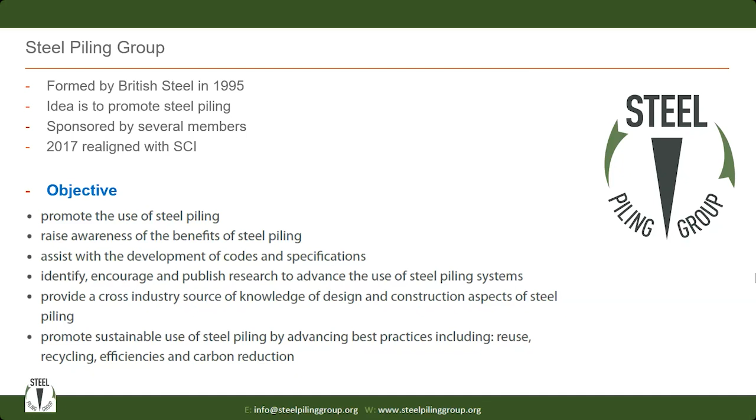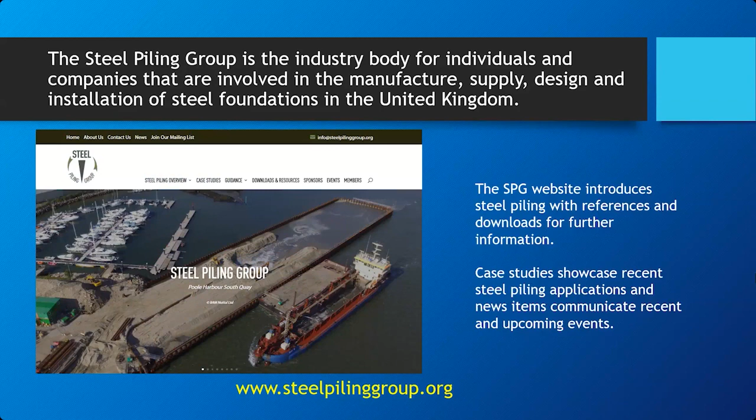On the website, you'll find six guidance notes. These are really helpful, practical, down-to-earth guidance notes on topics that frequently cause questions. The Steel Piling Group has 13 sponsors, who might be plant manufacturers, material suppliers, or contractors, and we're grateful for the sponsorship of this group.

I'll just finish off by showing you a couple of our recent publications. P308, the Specifier's Guide to Steel Piling, is our newest publication from last year, and it gives a very broad overview of essential topics to do with steel piling. Broadly speaking, our webinar today will be based on the topics covered in this publication, and you've got a free copy. The other publication is an earlier one, Durability of Steel Piling, which came out in 2019 and gives the latest understanding and guidance on how to be confident in the durability of steel piling. That is also freely downloadable from the Steel Piling Group website.

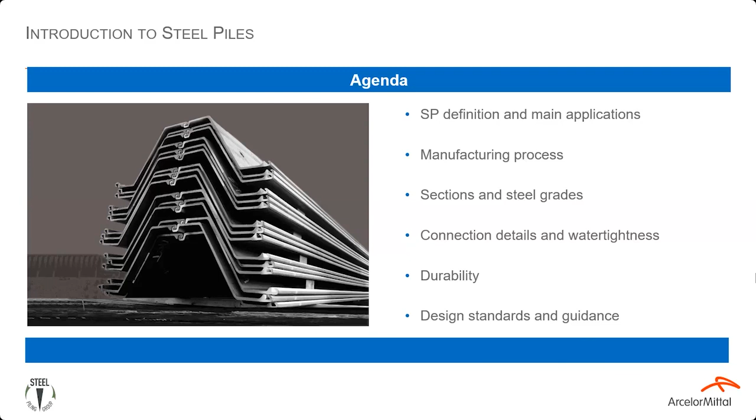We're ArcelorMittal, and we've been making sheet piles for a very long time now. As a company, we make all kinds of steel products, and as a team, I'm specific to the sheet piling department. So if we have a look at our topics for today: we'll look at what a steel pile is, how we make them, steel grades and how those are made, some connection details, durability, and I'll give you some information on design standards as well.

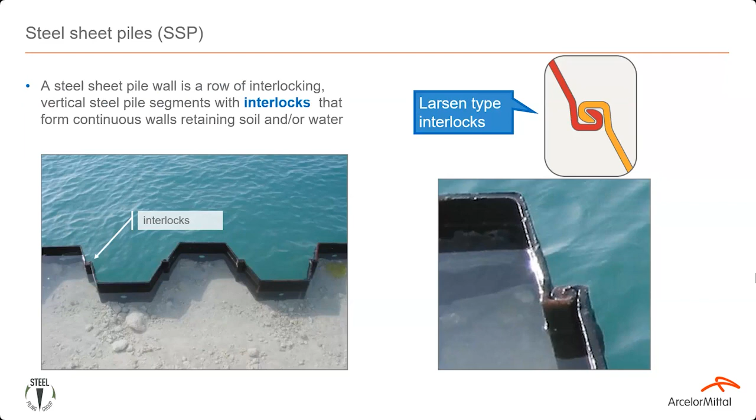So what is a sheet pile wall? It is simply the vertical interlocking of sheet pile segments. If we're looking at hot-rolled sheet piles, these conform to EN 10248 standards, where the interlocks are key. These are fully formed, so when you connect the piles together, the wall acts as a single unit, such that shear can transfer across the wall. This is what we define as a structural wall.

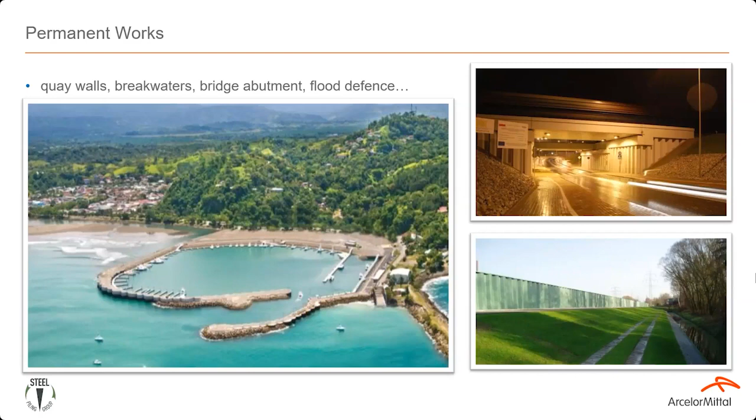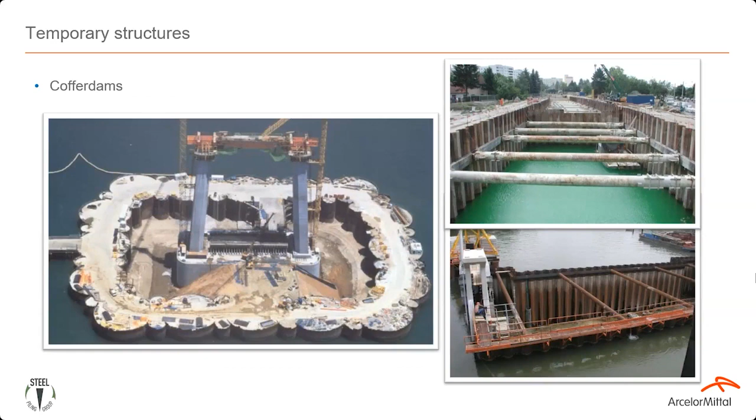At the larger end, we've got marine structures - permanent works such as breakwaters or quay walls. We've also got land-based structures such as bridge abutments and flood defense walls. And we can also see them used as temporary structures, such as cofferdams that are in land or water.

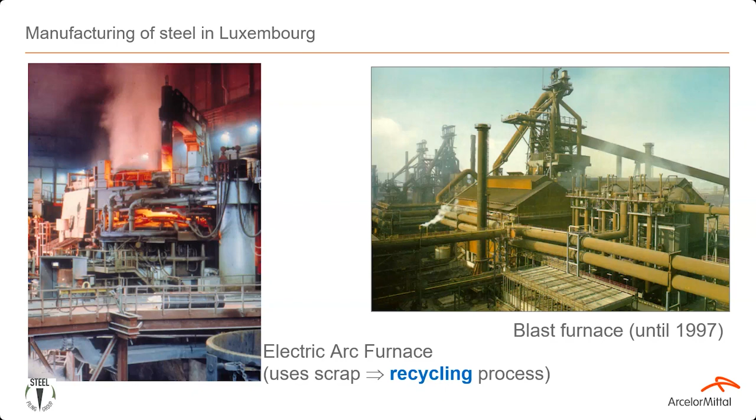The manufacturing process itself is not an easy task, but because of the many processes the steel has to go through, steel actually gets better with time. The traditional way of making steel is through the blast furnace method, but with this method, temperatures have to stay up all the time, and it requires a lot of resources. So in 1997, we shifted to the more efficient electric arc furnace method. This method uses scrap material, making it a recycling process, and it uses electricity, so it has a much lower carbon footprint for the piles.

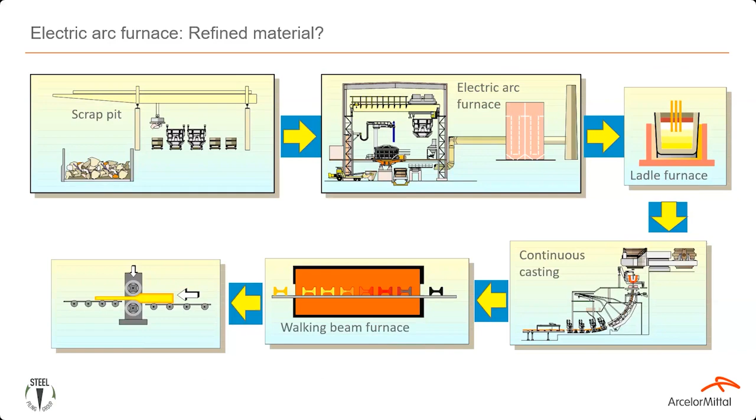If we have a look at the electric arc furnace method: steel goes into an electric arc furnace using scrap material. Then, through many processes, it liquefies the steel, and we pour it into a continuous casting system where it gets shaped into a beam, and using a water-cooled interior, we cut them into shape.

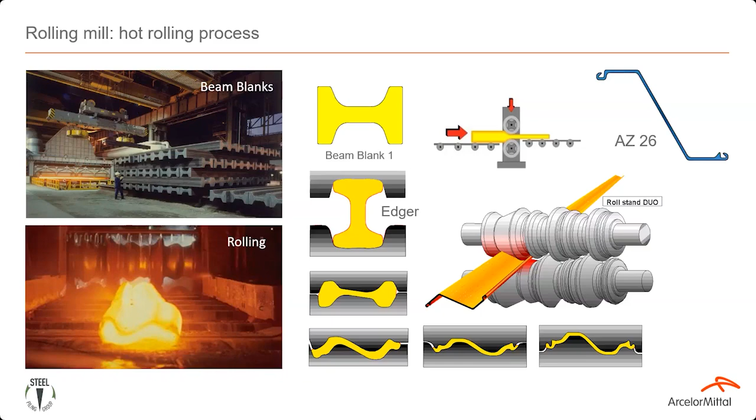From the previous slide, I mentioned that we shape them into beam, and there's two reasons for that. First, it's easy to store them this way, and second, they are ready to get formed into shape. At the rolling mill, the piles go through 4 different rolling stands, and the interlocks are the last to be formed because they are complex and have to connect to other sheet pile sections. So the tolerances are very critical for this to work. One thing to take from this is that all the sheet pile sections from us will be able to connect to each other.

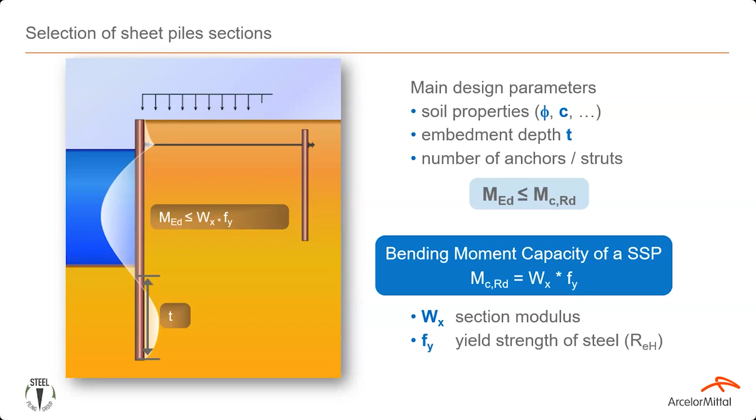Sheet piles are measured through the elastic section modulus per meter run of wall, and the higher the modulus, the stronger the section. If we look at designing the sheet piles, we have to look at the geotechnical design and also the structural aspect. For the geotechnical design, we look at the soil properties and variables relating to the depth of the piles, such as the CU value, the phi angle, and so on. This gives us a bending moment profile so we can calculate whether we need a cantilever wall solution or some type of combi wall system.

The piles are named simply based on the shape. If you look at our general catalog, there are four different pages showing the sheet pile sections, so there's quite a lot to choose from. If you look at a pile, for example an AZ 26700, A is for ArcelorMittal, Z is the shape, and 26 is the key number, which refers to the section modulus, usually rounded to the nearest 100. This also gives you an indication of the strength of the pile.

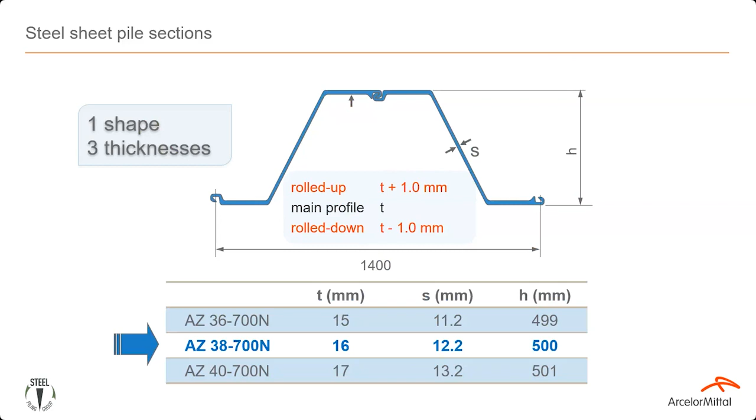The piles come in families of 3 or 4. To give you an example, for an AZ 38700N, we can roll 1 mil thicker and get a 40700N, and we can also roll 1 mil thinner and get a 36700N. N is just short for new, meaning it's our latest addition.

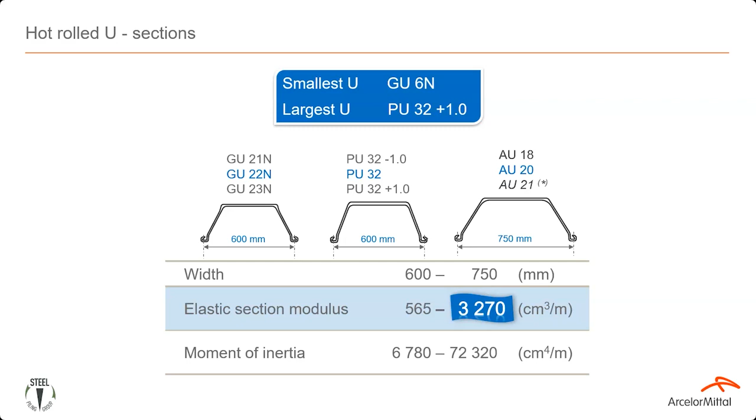We also have U piles, which are quite popular, including GUs and PUs. Many of these piles are actually the exact same, they simply come from 2 different mills. The GUs come from Poland, and the PUs come from Luxembourg. We also produce AU piles, which are actually more efficient and in production as well, but many contractors still prefer the GUs and PUs because they have the experience and equipment for installing those, so they tend to use those a lot.

With the interlocks, all of our piles have the Larssen interlocks, meaning they can all be connected together. You can connect a Z pile to a U pile section, and you can also connect to an existing sheet pile wall if the interlock is free and available. If you need tighter corners than 5 degrees, usually at the interlock we can achieve a 5 degree swing, but if you need tighter corners than that, we have a couple of corner sections that can help you.

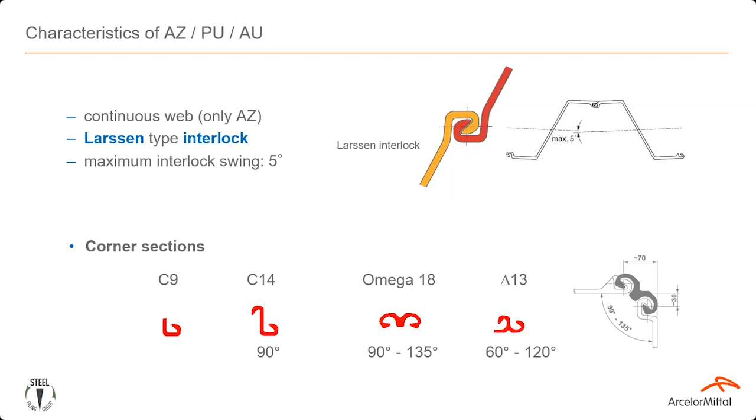If you look at the three corners, such as the C14, Omega 18, and Delta 13, these are mechanical interlocks, meaning you can connect them on a sheet pile interlock and achieve a specific angle deviation as listed. But if you need something more specific, we can suggest the C9 section. It's more adaptable - you can weld it at any point on the sheet pile and at any angle, and achieve any tricky angle deviation, say 20 degrees for instance.

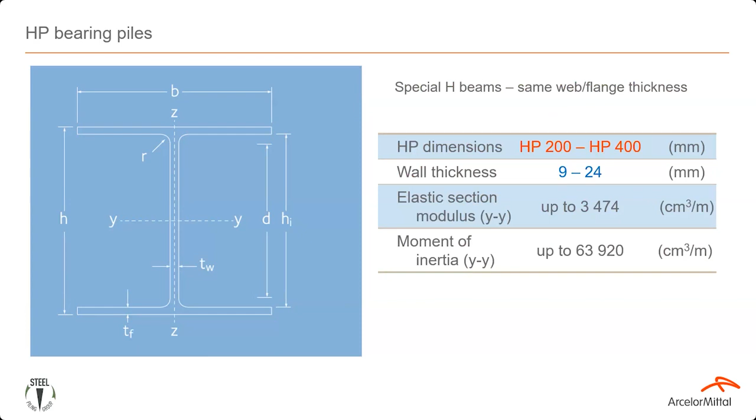Then we've got HP bearing piles as well, so we've made those too. You can get dimensions from 200 mil to 400 mil, and you can often find those with wall thicknesses of between 9 and 24. They're quite useful if you have a quay wall system and things like that.

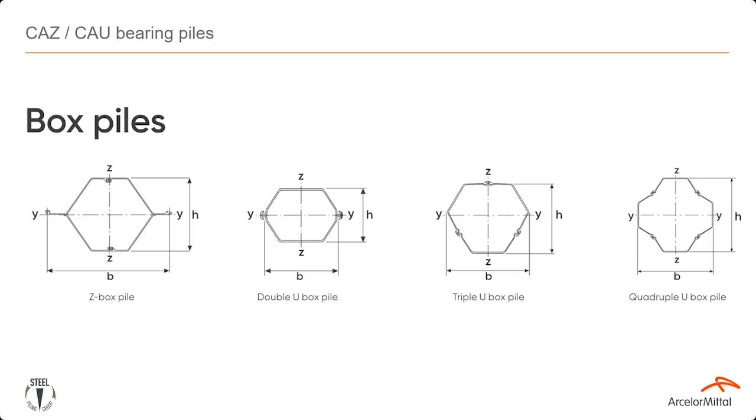Then we've got box piles as well, also bearing piles. They can be used - you can weld 2 or more different sections together and make box piles out of those. These can be installed in the ground as open box piles, and once installed, you can use them as dolphins and things like that, and they are quite useful.

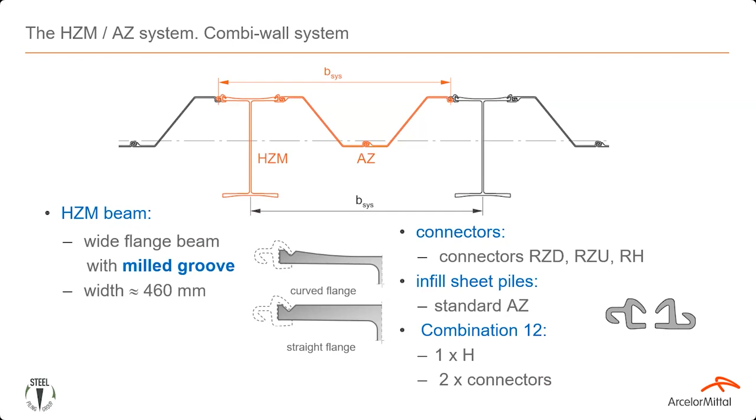And then we've got bearing combi wall systems as well. The HZM system is quite useful, and these are usually for marine environments. If you look at the H-beam on these piles, they actually have a much thicker flange than regular H-beams, and we have to mill a groove on the H piles to be able to connect a connector to those. Then we can connect Z piles to those ones.

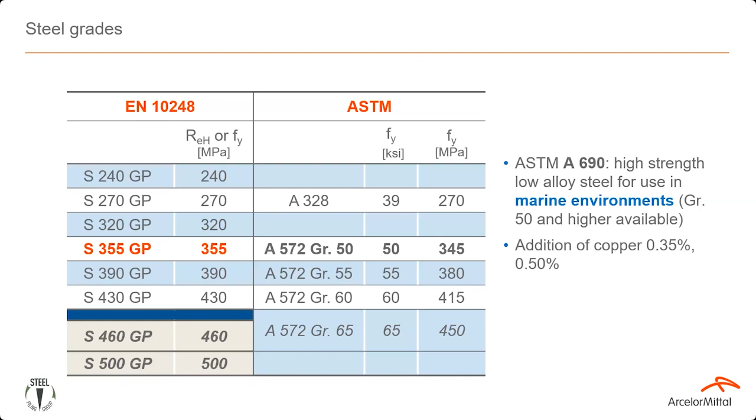This has been introduced last year, September 2023. We have been producing S460 from a while ago, so these are available. And S500, speak to us if you would like to do those as well. We can also make piles to different standards. If you're designing to ASTM method, Chinese, Japanese, that's easy to be done as well.

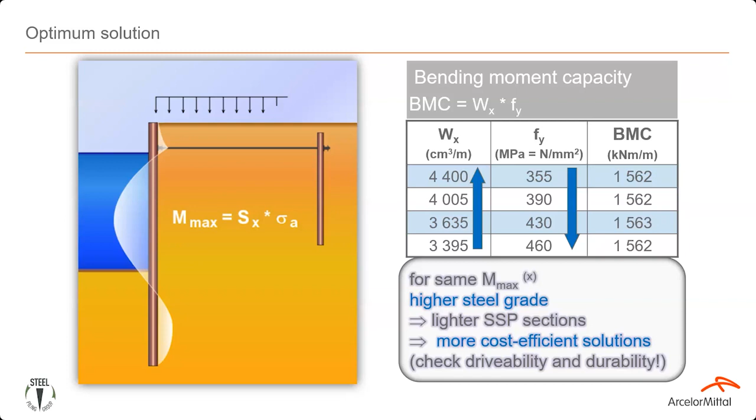Now, of course, there is an optimum solution. If you're designing with sheet piles, say you need a bending moment capacity of around 1500, and you've got 4 different pile sections using 4 different steel grades. As a rule of thumb, always go for the highest steel grade. It's always more efficient, but there are maybe 2 things you need to check: that you're not installing something too thin, as when using a higher steel grade you're also using a thinner sheet pile section, and also check your durability, because you need to ensure you're not installing something too thin over the lifetime of your sheet pile.

So sheet piles, there's various ways to avoid corrosion, and sheet piles will corrode when in contact with water and oxygen together. So you've got to protect them. One way to do that is through sacrificial thickness. If you look at the UK National Annex, it'll give you two tables to account for these losses.

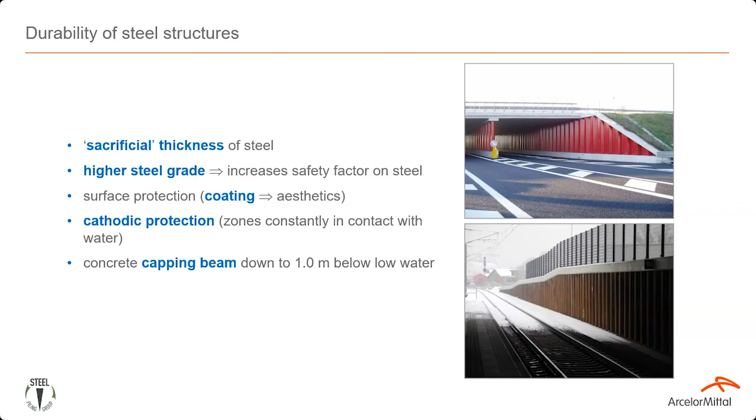You can also look at some other factors. If you look at a higher steel grade, this is just protection at the end of life, and it will give you a higher bending moment resistance, but you will still have to use some kind of corrosion protection. For instance, you can also coat the piles, and this is very often done for aesthetic purposes. You can also use a concrete capping beam. This can sometimes be used at road level, where it serves essentially for 2 purposes: it protects as a crush barrier, or it also protects against salt spray.

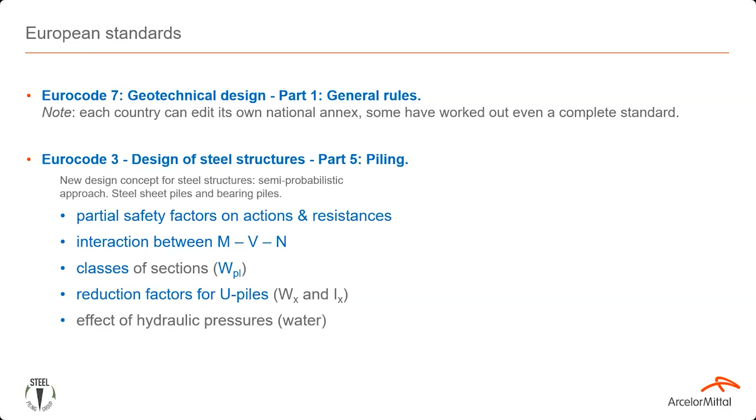Now, as I've mentioned before, we've got 2 designs for this, for the sheet piles. Essentially we've got EC7 Part 1, which would be for the geotechnical design. And then we've also got EC3 Part 5 for the design of steel structures.

Now, for most of your projects, you'd be looking at designing for a bending moment resistance to a class 2 or 3. These equations will help you with that design. But if you're designing to a class 4, local buckling is a possibility, and you'll have to do a lot of different calculations and a lot of searches to be able to get the piles to work. The worst thing is sometimes the pile may not work with a class 4. So it could be useful to try and get your steel to a class 2 or a class 3 for this one.

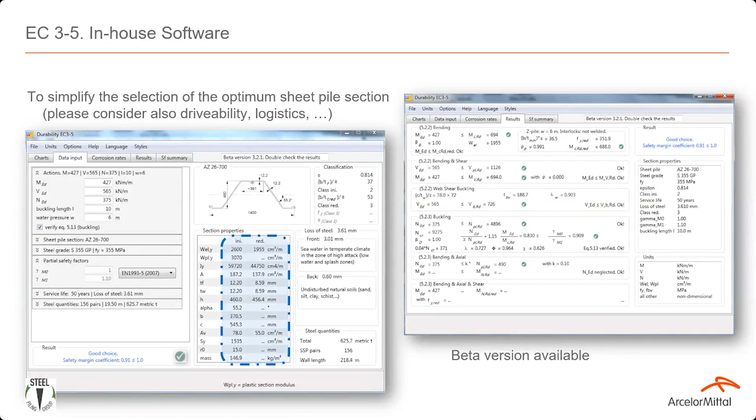Now we've got some durability software. This one is free to download on our website, and you can have a look through those. To give you an example with this one, you just have to include the steel grade, the sheet pile section that you're using, and then the software itself will calculate the losses for you, and it will give you your results for bending, buckling, and even axial forces, shear resistance as well.

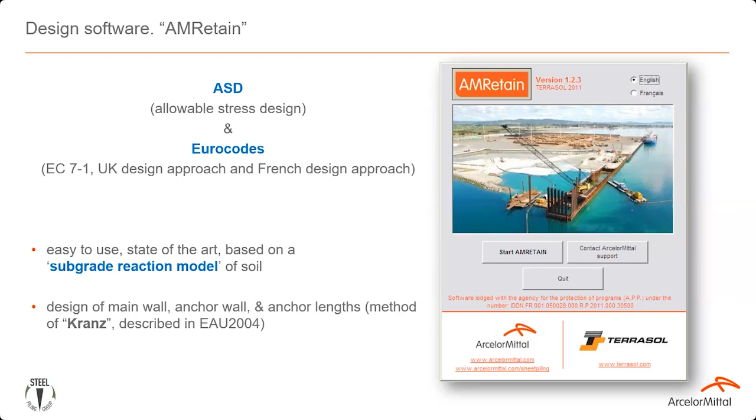This is also one of our softwares, AM Retain. For most of our projects, we usually use AM Retain, and then we cross-check them with other software packages such as Wallap or ReWaRD. One thing that this one does over other software packages is that it will calculate for double wall solutions, and it will calculate all the solutions with a subgrade reaction model, and all of that information will be calculated to Eurocodes. So it's quite useful if you want to have a look through that as well. But this one is available on request. It has been developed by Terrasol.

Now, when it comes to steel itself, it's fully impermeable. The only way that water can get through is through the interlock. Now, there's various ways that you can seal those.

If you have a water pressure of less than 1 bar, then you can look at something like a Beltan Plus or Arcoseal, and it will seal the interlock, making it watertight. And if you have a water pressure of less than 2 bar, then I suggest you have a look through Roxan Plus. Now, this one is a water swelling product, and it can take up to 2 hours to start swelling up.

And if you need something that's higher than that as well, we've got the Akila. This one is useful for water pressures of 300 kPa, and it works as a compressive filler. So it's got like a three lip system, and when these piles are connected, the wall will act in compression, and it will completely make the piles watertight.

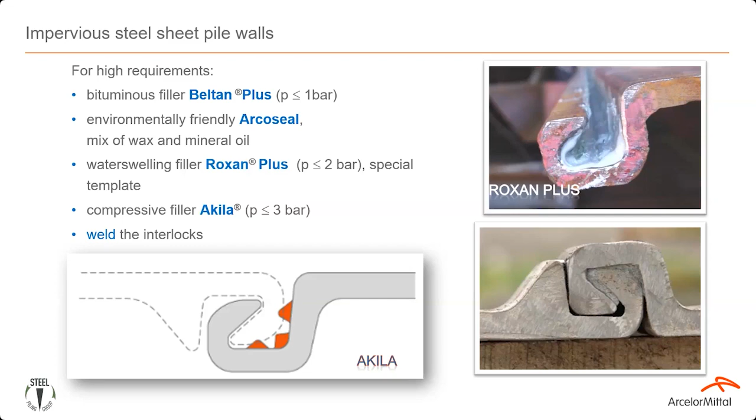And if you need that full water tightness, then welding the piles can be an option. You can weld the piles fully, every double pile, at the mill. And on site, you can weld at every other interlock down to the formation level.

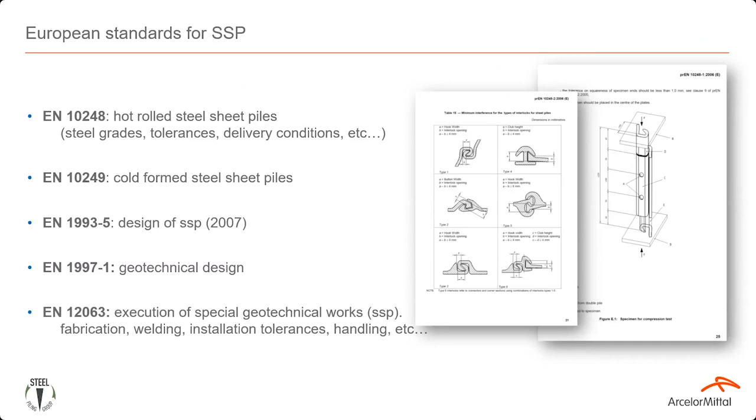Of course, we've got some literature for you. And this is a list that applies mostly for your design. So we've got EN 10248, EN 10249, and EC3 Part 5 for the design of steel piles. Got EC7 Part 1 for the geotechnical design, and also EN 12063, which is very good for execution of special geotechnical works.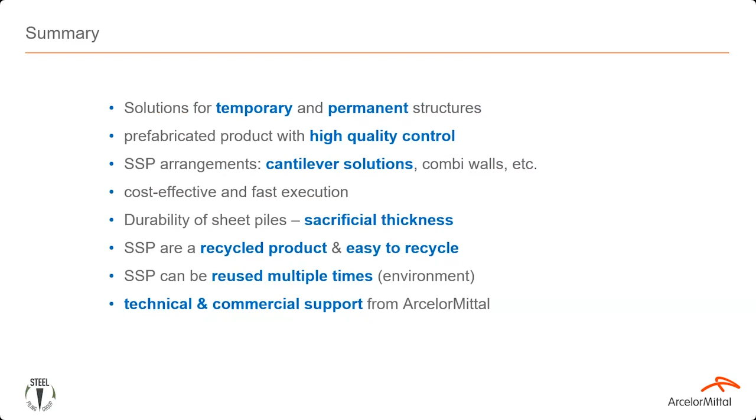So to conclude, we have seen sheet piles, steel piles as temporary and permanent solutions. We have seen them as a combi wall system. We have seen some durability of the steel piles as well, and how sacrificial thickness is one of the most cost-effective solutions. We have seen some optimum solutions, how you can optimize your sheet piles. And we have also seen some watertight solutions.

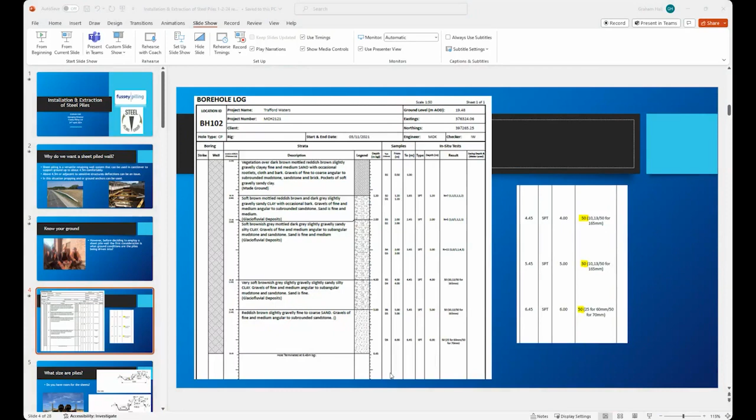Very brief example, this was the job up Trafford Waters in Manchester, and they wanted a hole in the ground about 5 metres deep, just in sheet piles in cantilever. However, part of the issue was, if one looks at the N values of the soils at 4.45, 5.45, effectively it's refused with N values of 50.

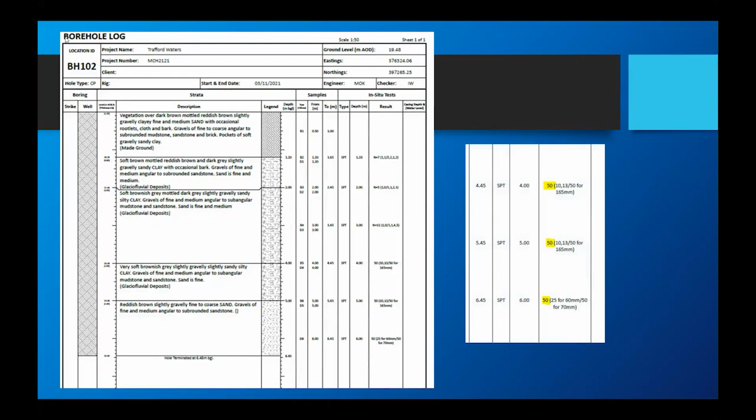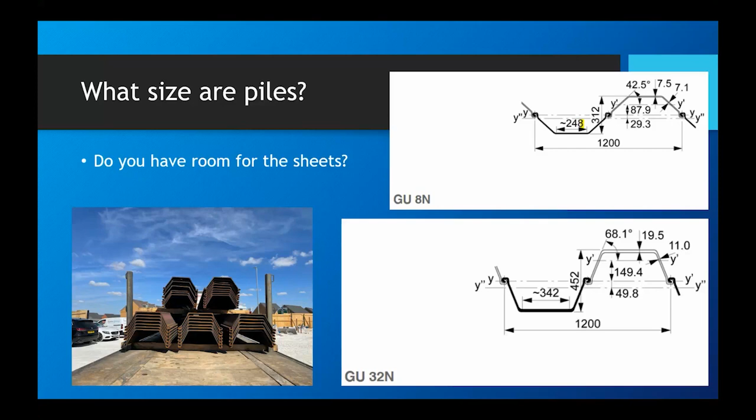So what size are sheet piles? As Jess discussed earlier, you need to make sure you've got sufficient room on site, and from the lightest pile sections, the piles are 312 millimetres deep, up to the heaviest U sections at 452. So one needs to allow a 400 to 450 millimetre sheet pile zone in which the piles can be installed. We often see just 100 mil of sheet piling zone because people think of them just in terms of trench sheets rather than heavy duty sheet piles.

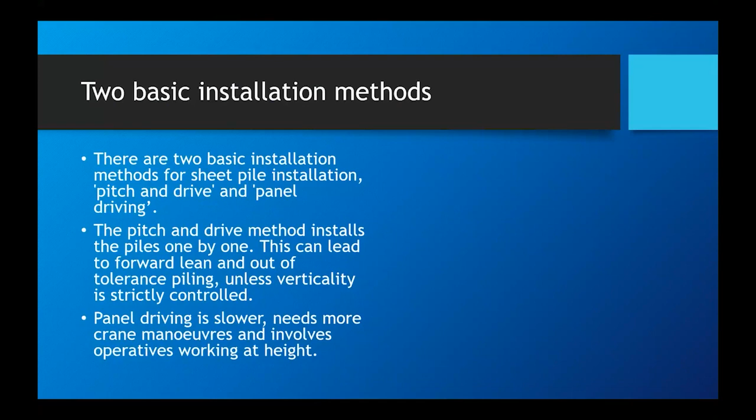So in terms of installation methods, there are two basic installation methods. There's pitch and drive and panel driving. Now the pitch and drive installs the piles one by one. This can lead to a bit of forward lean of the piles and some out of tolerance unless you're controlling the verticality as you're driving them. Panel driving, a more traditional technique, is slower and needs more crane manoeuvring and involves operatives working at height.

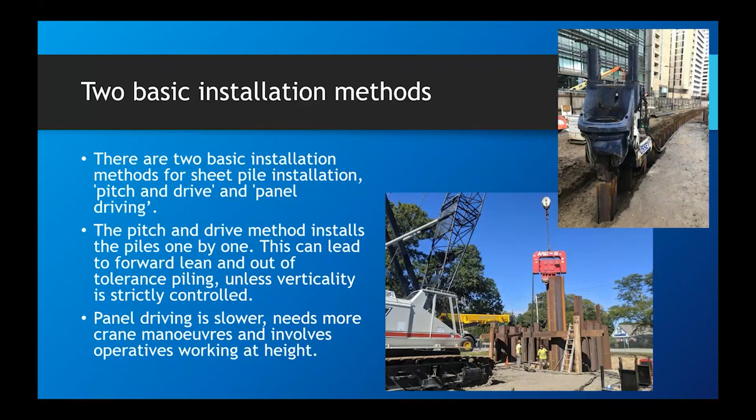Some of the main considerations are the soil conditions, the sheet pile sections and length, and driving equipment, as well as whether the sheet piles are going to be designed as permanent or temporary. If the wall will be visible, such as this example, you might want to paint them for aesthetics, or leave a lovely stock rusty colour. Installation tolerances are very important in terms of vertical position and alignment, and as discussed earlier, interlock sealant systems can be used to make the piles impermeable.

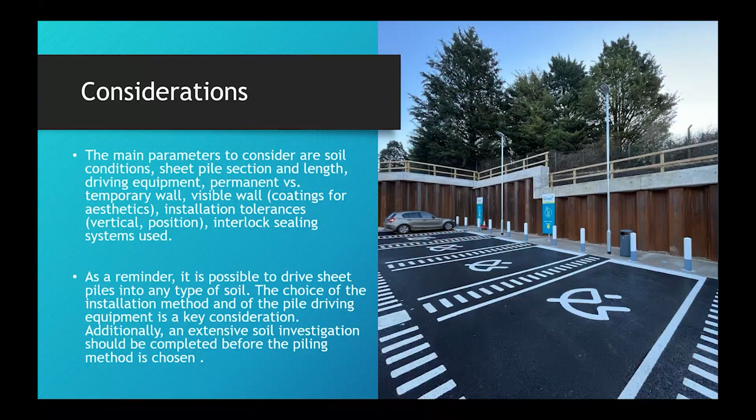As a reminder, it's possible to drive sheet piles into pretty much any soil type, but the choice of installation method is key for the pile driving equipment. An extensive soil investigation should be completed before the piling method is chosen. My old geotechnics lecturer used to say, you pay for a ground investigation whether you have one or not.

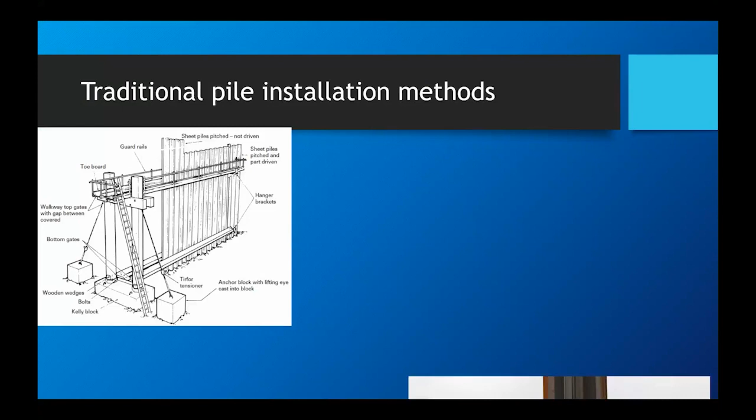So talking about traditional piling installation methods, still used a lot in the marine environment. This is what we call a Kelly block setup, where you set up a frame and the sheet piles are interlocked into them. These are called piling gates, and they're good for ensuring the alignment of longer piles.

Now, when constructing sheet piles by what's called panel driving, you set up the gates, install the first two piles and drive those down. You then fill the gates up with remaining piles, drive down the last pair of piles to keep the piles straight and plumb, and then drive the remaining piles back to the top gate level. You can then shift the gate left or right depending on the direction of construction.

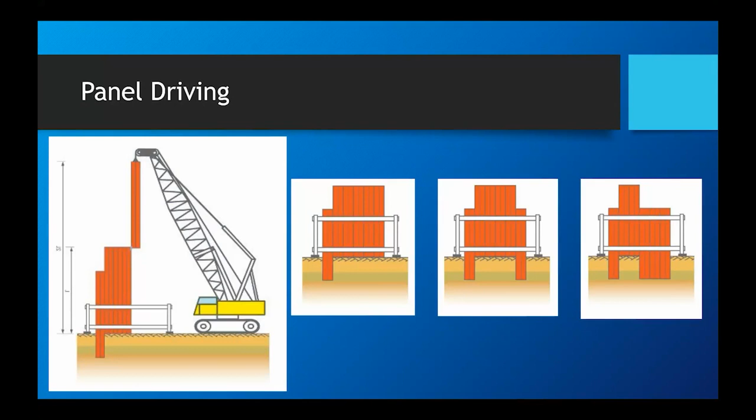Crane suspended equipment, the traditional stuff, is used to drive the piles in sequence, but noise and vibration must be considered when using this equipment. Here we can see a piling vibrator hanging off of a traditional lattice jib crawler crane.

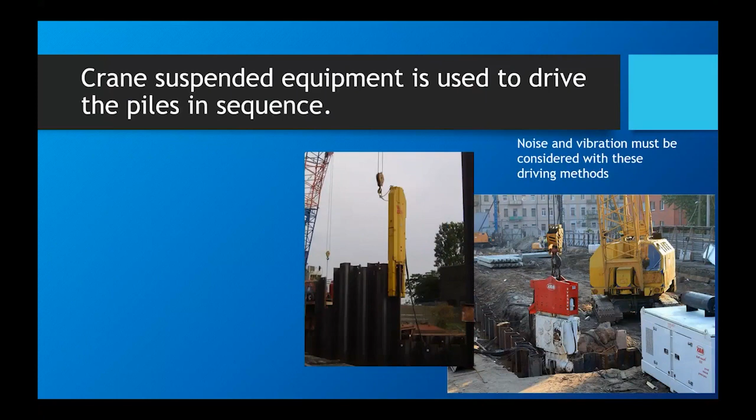Here is a BSP hammer. Notice the legs extending down, again crane suspended, with the yellow legs extending down beyond the top of the piles to keep the pile driven straight. And again, traditional piling gates in a marine environment with a Dawson hammer there.

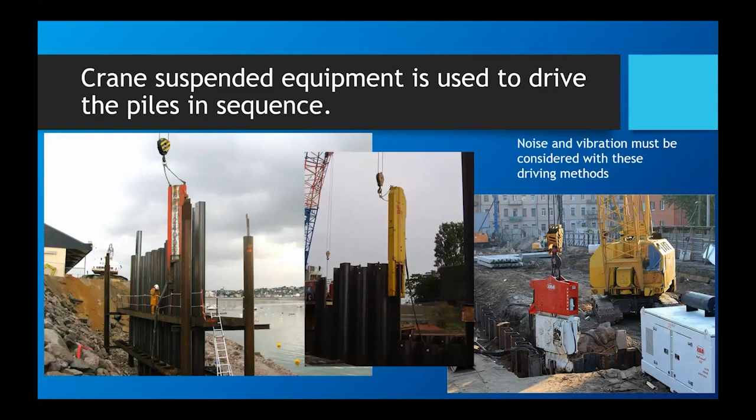Starting at the bottom end, really at the lowest level, an excavator mounted vibrator can drive the lightest sheet piles and trench sheets into the ground. The size of the vibrator and excavator must be considered relative to the ground conditions and the type and length of sheet pile to be installed.

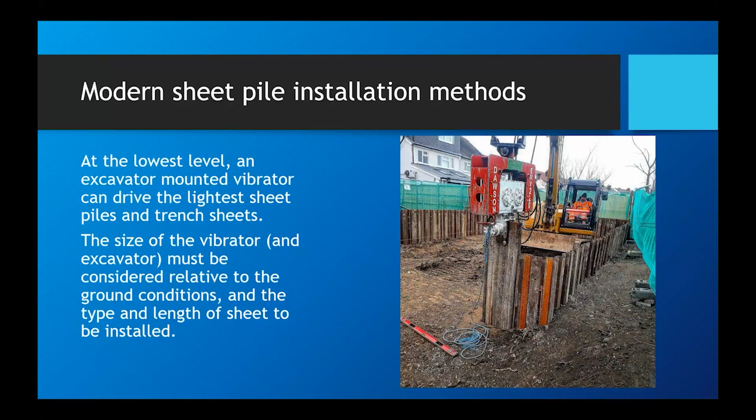It's okay for driving into granular soils, but not very good for driving into cohesive material.

You still occasionally, once people have stood piles up with an excavator-mounted machine, see an old air hammer being used. The technology is very old. It works, but it's still used in some places. But they do create a lot of noise, and you can damage the sheets when you're driving it.

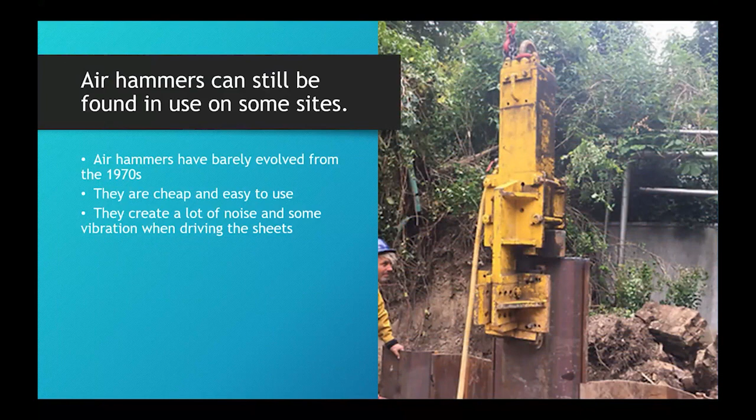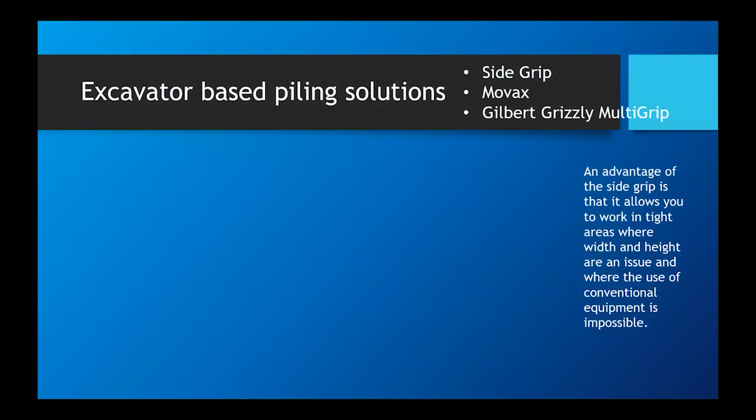Now, excavator-based piling systems—you might know trade names like Movax, Side Grip, or Gilbert Grizzly Multi-Grip. The advantage with these sorts of systems is that it allows you to work in a tight area where width and height can be an issue, and where conventional cranes and drop hammers are impossible. You can put various attachments on the end of it.

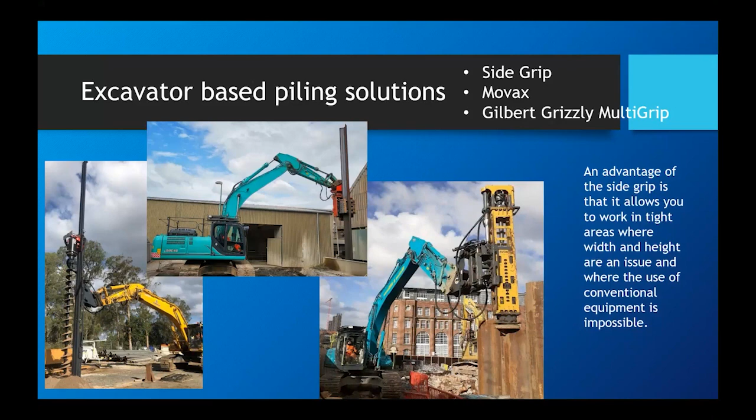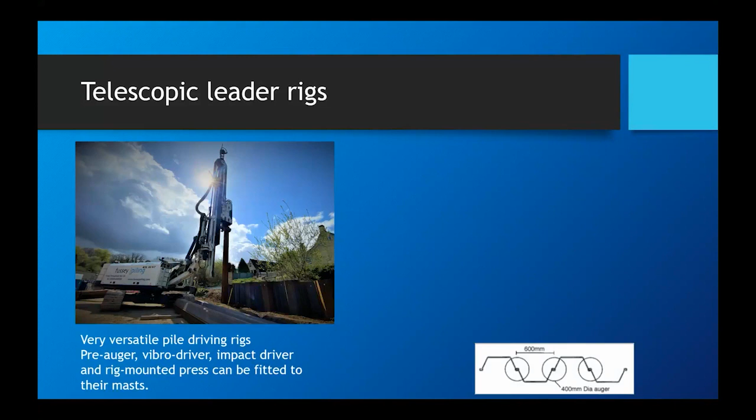Telescopic leader rigs are very versatile rigs. Again, you can change the front end from a vibrator, a pre-auger, an impact driver, or even a rig-mounted press. Here's a Bauer RTG showing vibratory piling on the left, and on the right some pre-augering with a nominal 400 diameter auger.

With respect to vibratory installation, as a business, we tend to use the Bauer RTG 16T leader rigs. Very fast installation—potentially 750 square meters of piles installed in a week. We tend to drive piles up to about 14 meters, hence the name 16T—you can drive a 16-meter sheet.

With all these leader rig type systems and modern driving systems, you get low levels of ground-borne vibration and some noise. We would tend not to drive piles closer than about 15 meters to a building, but you take each project on its own merits.

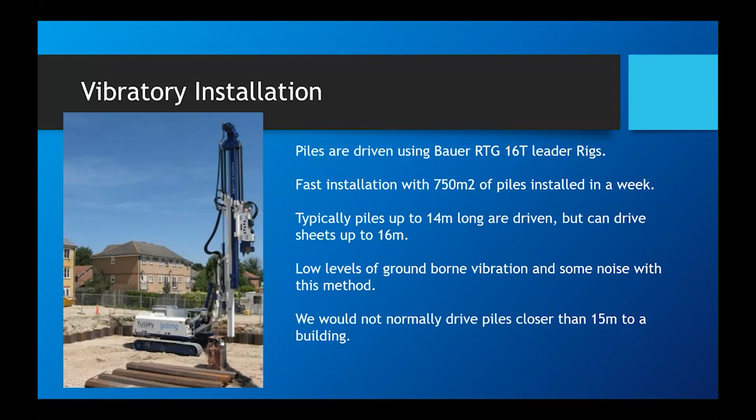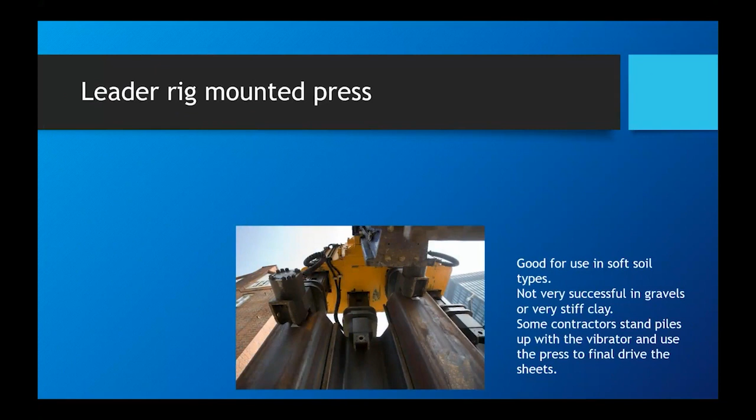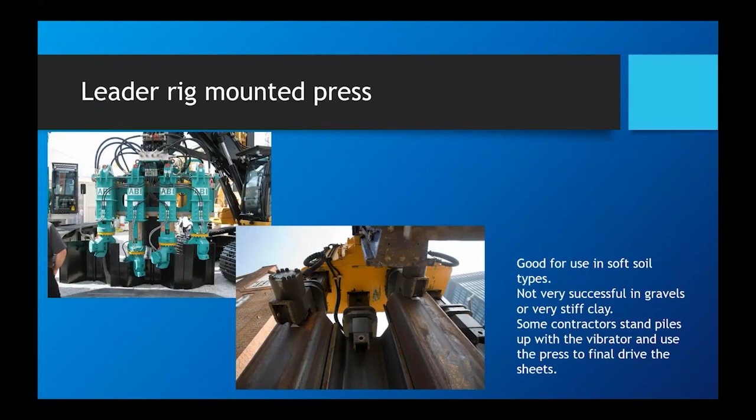Again, talking about the versatility of the leader rig, there is what's called a leader rig mounted press, or hydro press, made by our friends at ABI. What this does is grip hold of 4 piles and push the piles in individually, then lower the 4 piles down. It's very good in soft ground or cohesive material, but not very good in stiff clay or gravels, just by the nature of the beast.

Some people tend to stand piles up with minimal vibration, and then use this to back drive piles down to level.

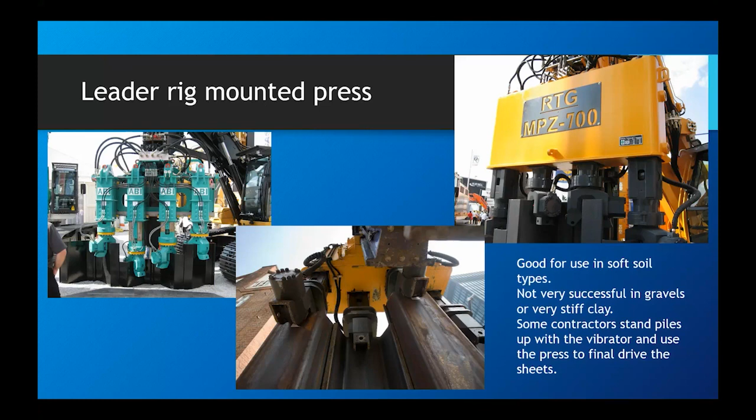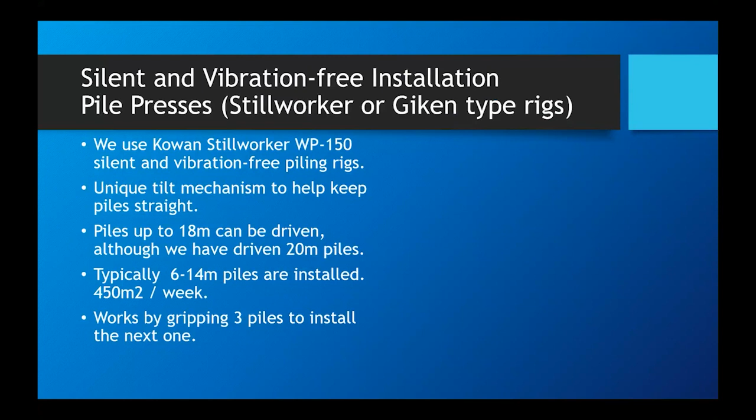Another tool in the box is a silent, vibration-free installation pile press called the Kowan Stillworker, or Giken-type rigs. As a business, we tend to use the Kowan Stillworker WP150.

The WP150 has a unique tilt mechanism to ensure, as I mentioned at the beginning, with a pitch and drive method, there's a tendency for piles to creep forward and lean. Using the tilt, you can ensure the piles always go in plumb. Piles generally up to about 18 meters can be driven. We've driven 20 meters, and I'm aware of people driving 24-meter long piles with this system.

Typically, 6 to 14-meter piles are the bread and butter, about 450 square meters of piling in a week. In terms of pressing force, the WP150 will press up to 150 tons on an individual sheet and will pull up to 160 tons to extract a sheet.

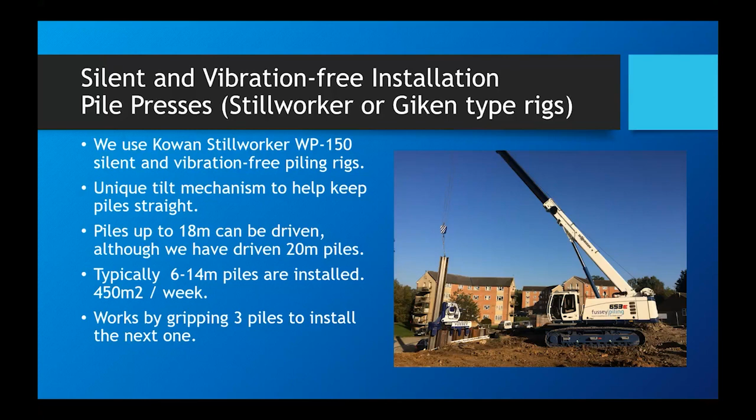There's probably 30 to 35 units currently in the UK pushing piles in. The thing with this method, though, is obviously driving the first 3 piles.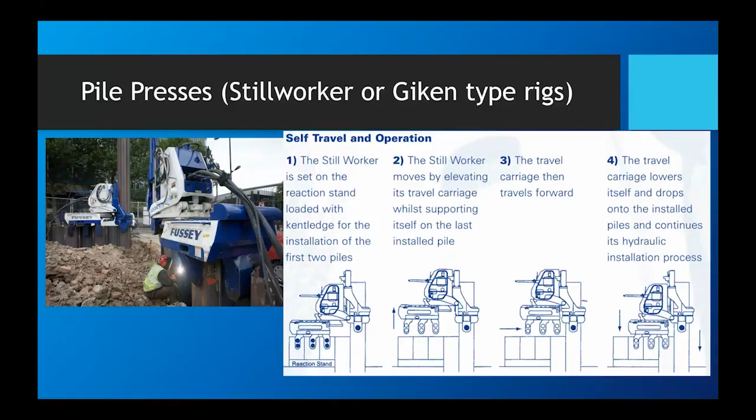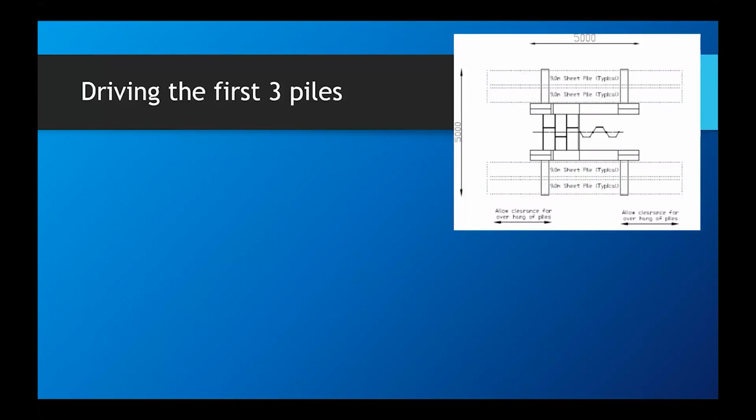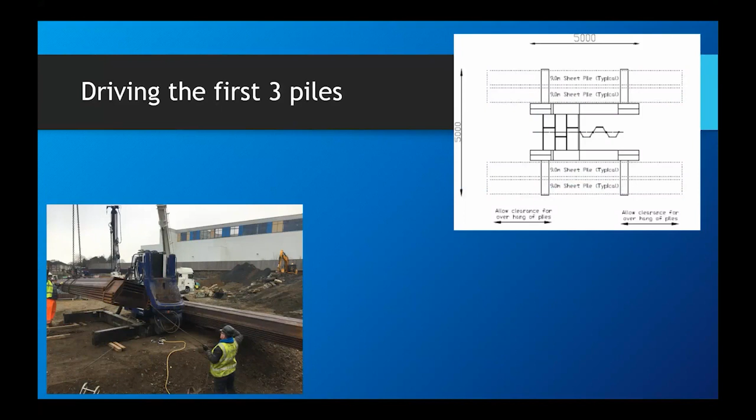Some people use a Movax or piling vibrator to drive the first 3 piles, but you've still got noise and vibration in that scenario. We tend to use a reaction stand, which looks a bit like this in section. This particular stand is slightly elevated because we're putting dummy piles in to go into the side of a hill, but here's some piles down at a reaction stand at ground level.

We tend to put the sheet piles used for the project onto the reaction stand, which has about 50 or 60 tons of kentledge to react against. You use that reaction weight to pull against to install the first 3 piles, and that's a back view of it.

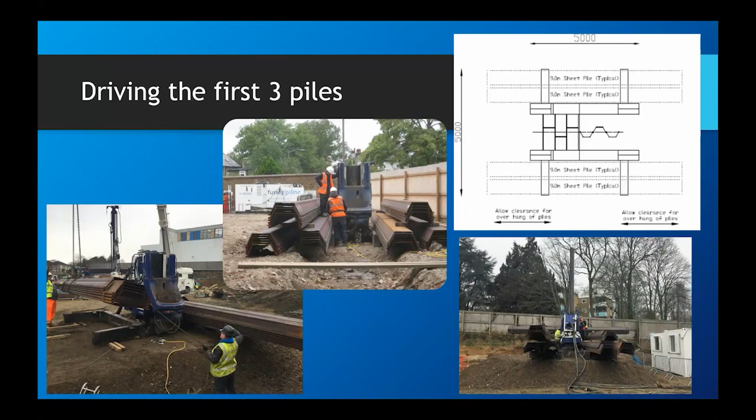In tougher driving conditions—dense ground or stiff clays—you can use a combination of pre-augering and/or water jetting to assist in getting the piles in. As I mentioned, the SCI publication 308 gives a lot more detail, but on this particular site in Southwark, you've got dense gravels overlying London clay. On this project we pre-augered with a 400 diameter auger at 600 centres all the way around to facilitate driving the piles. Other people may well water jet to achieve the same.

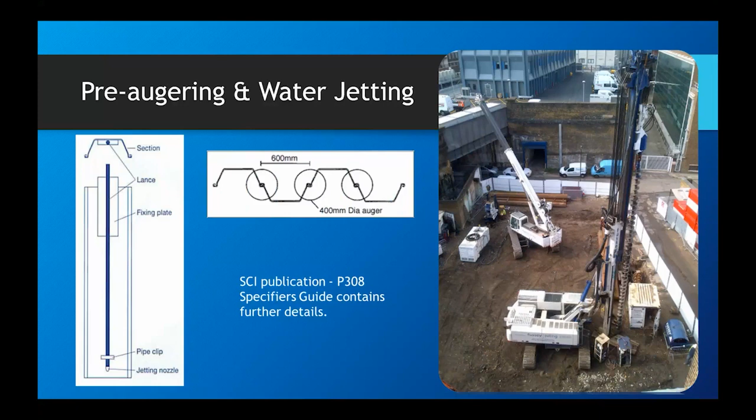When you've got really tough ground conditions, you can get a real beast of a machine called the Giken Super Crush. It uses a rock auger housed inside a casing to penetrate the hard ground. As you advance the pile, the auger removes some of the soil, enabling silent piling into very hard ground and rock. Production isn't rapid with these systems, but it does enable you to get piles into ground you perhaps wouldn't ordinarily manage.

Interestingly, I understand the minimum pile section for this would be a 7-meter long GU27, which is quite a heavy pile for that length. But you can drive piles in pairs, as Arcelor's heaviest section, the AZ50, up to 24.5 meters, with a different type of Super Crush. These machines are quite heavy though—the single press weighs 16 tons and the double Z press weighs up to 27 tons—so you do need serious craneage to move this equipment around the site. But in the right ground, in the right conditions, it's a useful tool.

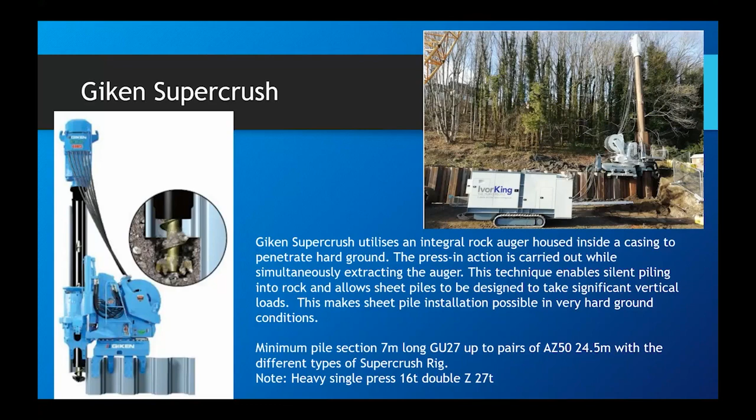Now, once you put all the piles in, sheet piles are very useful as temporary works, and so you often want to pull the piles back out again. That can be completed with a piling extractor vibrator that's crane suspended or mounted as a leader rig, or alternatively, which we tend to do, we use a pile press, which avoids the need for anybody to work above ground level.

It's also obviously a silent and vibration-free method of pulling the piles. Again, with the Still Worker, it grips on the tops of the piles and takes out each sheet one by one.

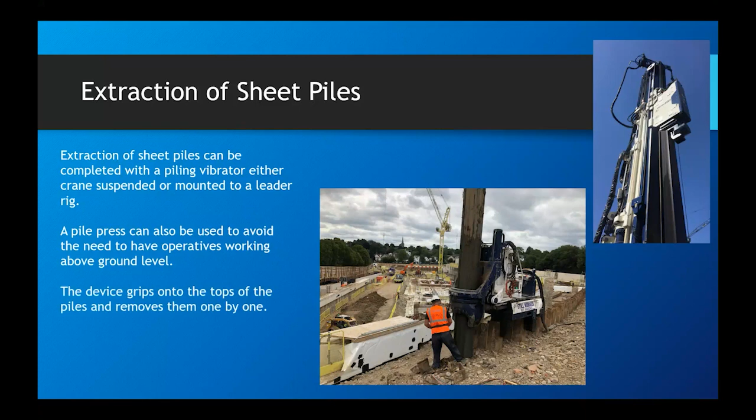Obviously, if you're closer than 10 meters, the noise level can be considerably louder. This also needs to be considered within the context of the site, i.e. if you're working next to a noisy motorway, will the piling operations actually be louder than the adjacent noise?

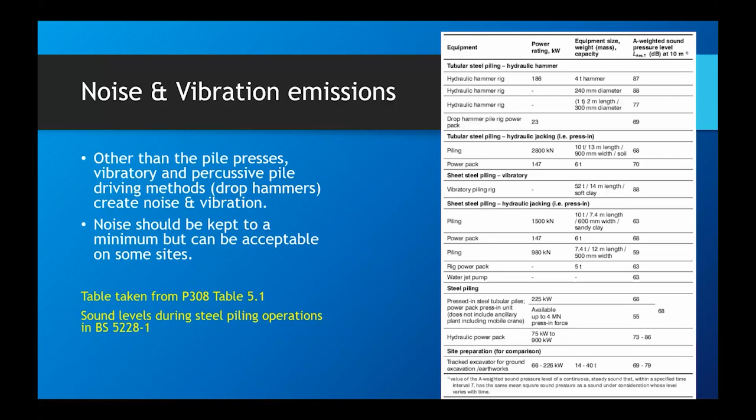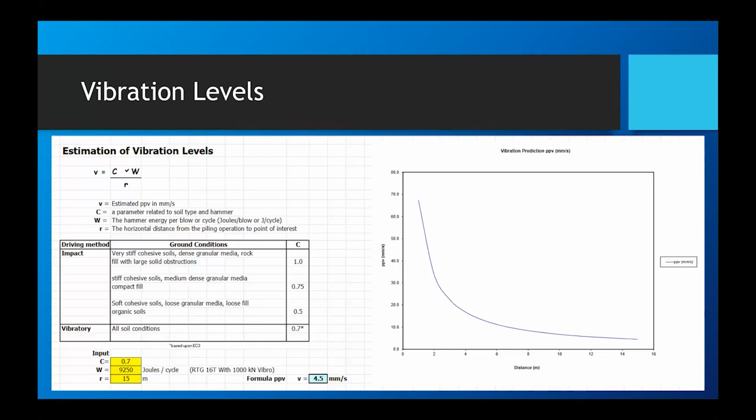But it dissipates very, very rapidly. And again, if vibration is a problem, such as when you're working adjacent to a water main, a gas main, or some other sensitive structure or utility, it's always worth getting some background readings before the piling equipment arrives on site, because sometimes you can find the background readings are greater than the limits you're trying not to exceed.

There's no black and white answer as to reducing it by a number, but pre-augering can help to reduce vibration on occasions.

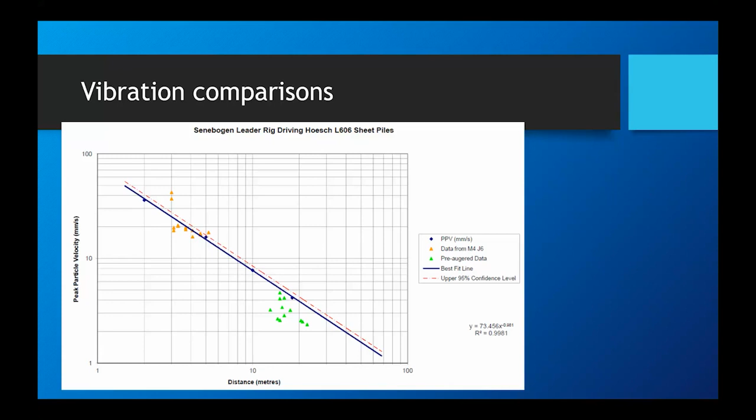Again, this is a very brief case study. This was a job in Chester. It was a care home. There were people next door, just over the fence, who didn't want any noise or vibration from driving the sheets.

But it just shows how low the vibration levels will be from silent and vibration-free piling. It really does what it says on the tin.

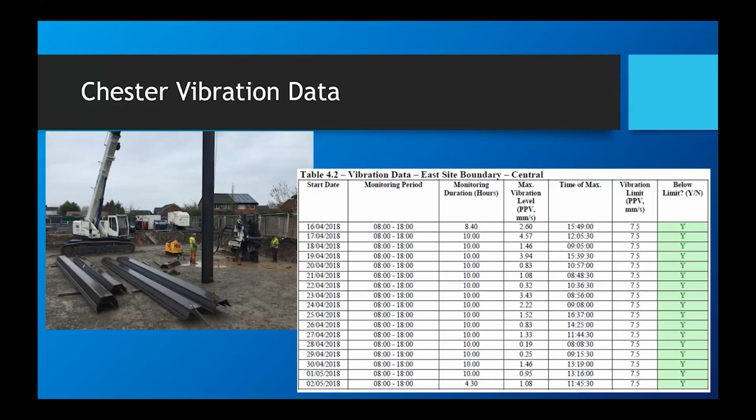So, a few final thoughts and conclusions. Are sheet piles suitable for what you want? Is the retained height reasonable for sheet piles up to 4.5 meters, or propped, or are there excessive deflections above 4.5 meters?

What are the ground conditions? Have you allowed enough room for the piling element? Have you allowed enough room for the pile driving equipment?

Is noise and vibration an issue? Does the layout work in whole piles? Engineers have a habit of not designing schemes to allow for whole piles and just assuming one can make a lot of specials. That really doesn't happen very often.

And have you allowed for deflection and tolerances? Sheet piles form a flexible retaining wall, so you will get deflections when the piles are installed.

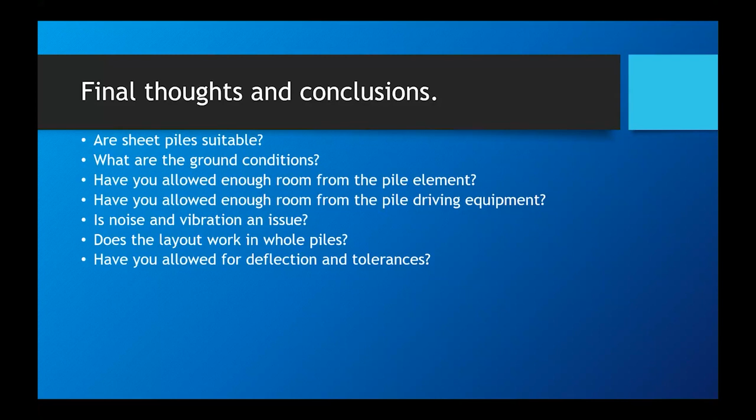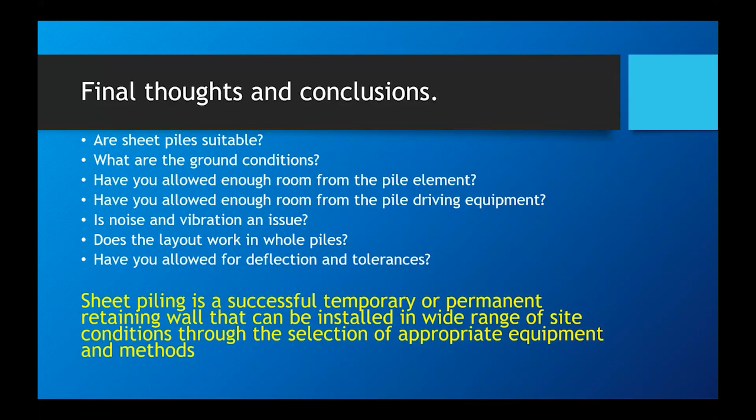So in summary, sheet piling is a successful temporary or permanent retaining wall that can be installed in a wide range of site conditions throughout, through the selection of appropriate equipment and methods. I hope you found that useful. Any questions? Thank you.